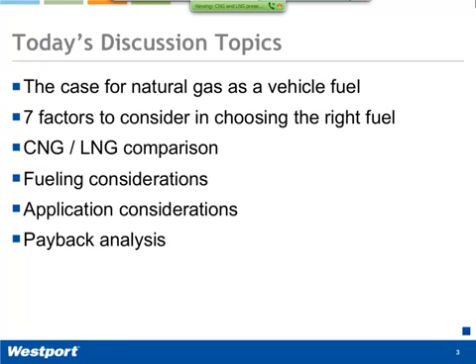Thank you, Nicole, and welcome everyone today. We're very glad that you were able to join us to talk a little bit more about natural gas, specifically the 2 different types of natural gas available for transportation use: liquefied natural gas and compressed natural gas. Today, more and more fleets are choosing to move to natural gas as their transportation fuel.

Every day, it seems, there's another announcement of a fleet or company that's decided to make this transition, and primarily they're doing this because of the economics involved. Natural gas is less expensive than diesel or gasoline, and in fact, almost the least expensive fuel available in the marketplace.

As fleets decide and make their decisions, it's important to consider the right factors as we move forward, to look at the type of engine system that's important, and to look at the fuel choice. There are some differences here, and of course there are many other opportunities for people beyond natural gas, but we won't be talking about that today. Then there's a couple of different choices with respect to how natural gas is stored.

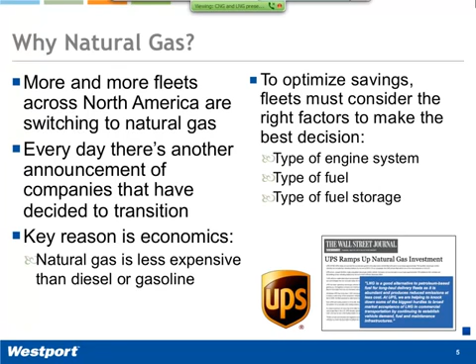So we've divided this down into 7 different factors in making an informed decision about fuel, specifically for LNG and CNG. You need to look at your vehicle type and its application and understand that very specifically, and look at the advantages and disadvantages of choosing either LNG or CNG for that vehicle type.

The duty cycle, including the range, speed, idle time, and other factors are something that need to be looked at carefully, and we'll talk about that a little bit more here.

The combined weight, the payload of the vehicle, whether it's weighing out or cubing out in its application, and then what the impact would be on that specific application in terms of weight for the storage tank, the fuel tank, and its weight as well as its contents.

The hours of service makes a difference, of course, how long the vehicle is being driven each day, what its downtime looks like, how much it's idling, and these need to be taken into account as well.

As you make the decision, you'll be looking at fuel costs and the savings achievable versus diesel fuel, or in some cases gasoline. Your fleet fueling needs in terms of refueling cycles, how often the vehicle needs to be refilled, who is doing it, and the time available needs to be taken into consideration because there are differences in the two fuel types. Finally, and probably most importantly, the fueling infrastructure available to you along your routes is going to largely determine what is best in terms of the choice available.

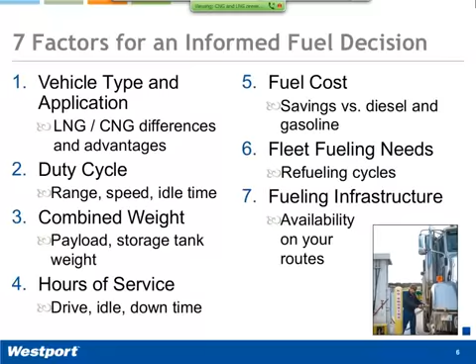Just a little bit of definition. CNG and LNG are simply two different ways natural gas is stored. There's really no such thing as an LNG or CNG engine. We see this written a great deal, but it's simply a choice as to how the fuel is stored on board the vehicle. The engines, generally speaking, will run on methane, which is always a gas, and it's delivered to the engine as a gas. If it's stored on board as CNG, as a gas, it doesn't need to be regasified. But if it's stored on board as a liquid, there is a process for returning that liquid to a gaseous state before delivering it to the engine. So that's just a distinction to help people think about this.

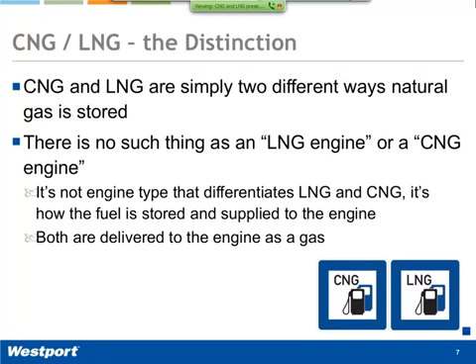The engines themselves are relatively agnostic to the fuel type, and this would apply also to other forms, like biogas or something similar. The engine doesn't really care how the gas is stored - it always uses it in the form of a gas, not in the form of a liquid.

LNG is a cryogenic liquid. It's natural gas that has been reduced in temperature to minus 260 degrees Fahrenheit, or a little over 162 degrees Celsius below zero, and that's at atmospheric pressure.

Whereas CNG is still in its gaseous state and stored at high pressure in a pressure vessel. Generally speaking, non-North American or past standards have been at 3,000 psi, and the current North American standard is at 3,600 psi for a full tank, and we would use that pressure all the way down to lower pressures, to the rail pressure of the engine before the tank is empty.

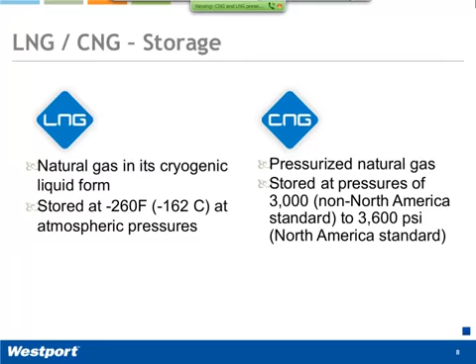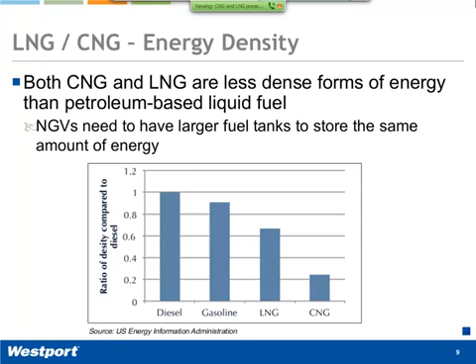Here's another way to look at it, the other way around. A gallon of liquefied natural gas - you need 1.7 of them to make a diesel gallon equivalent, and about 3.8 times as much CNG to make a diesel gallon equivalent. This is on a volume basis.

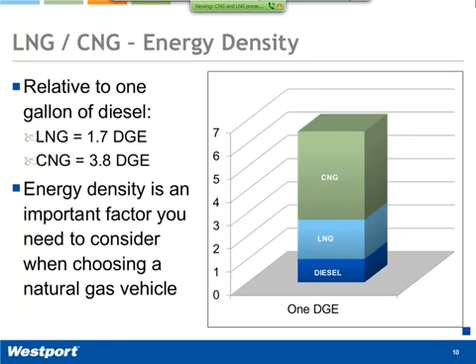Energy density is a factor that you need to consider when choosing a natural gas vehicle. This is not a factor in terms of running the engine or the amount of power the engine can put out. It's simply a question of how much storage space is required on board the vehicle.

So I'm going to turn it over to Jim right now, and he's going to talk a little bit about fueling considerations. Well, thank you very much, John.

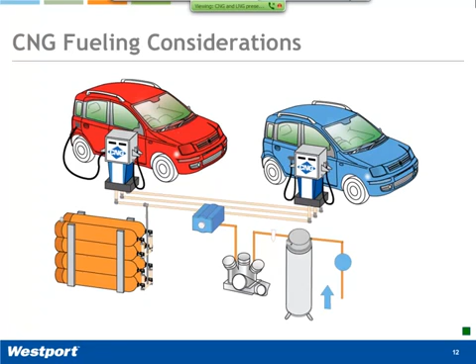We believe compressed natural gas is best suited for vehicles that drive less than 250 miles per shift or per day, or burn less than 40 gallons of fuel.

As I've mentioned, in most cases natural gas for these types of applications is delivered by the local distribution company. Our LNG stations are all designed to provide compressed natural gas, so we can compress a liquid and actually make CNG. The highway stations we're building will provide that service at a future date.

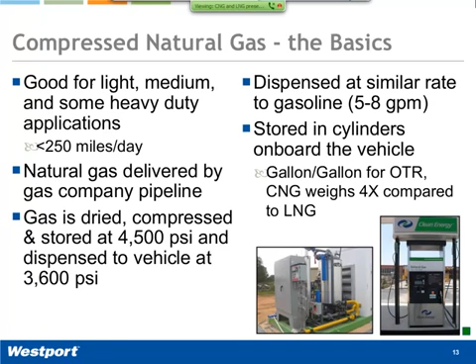On a large station, we can dispense at about 5 to 8 gallons per minute over the fill. But one important point is that when you look at a large truck, bus, or trash vehicle, the weight added for CNG compared to LNG, gallon for gallon or BTU for BTU, is about 4 times that of LNG. So if you're weight sensitive and doing bulk hauling, you'll lose payload capacity using CNG versus LNG.

The best application for CNG is what we call a time fill, where we fuel each vehicle individually in parallel, like in the pictures below. These are 2 solid waste projects we built - one in Seattle on the left, and the other in Livermore, California on the right. Today we fuel about 6,000 refuse trucks this way. We started the refuse industry back in 1997 with this type of application.

Today, Waste Management and Republic Services are 2 of our larger clients. We build most of their stations. Because of the economics, Waste Management and Republic are buying in excess of 80% of their new purchases in CNG. The CEO of Waste Management, David Steiner, has said that if he can buy CNG and has gas available, all their replacements going forward will be natural gas. It's the best value for an individual or proprietary considering natural gas.

So if you park your vehicles overnight, this is a great application. It costs less for the equipment. You're also able to get a full fill, which we'll talk about shortly. All the heat gained during compression is dissipated because you're filling over a 3 to 6 hour period. So when the trucks leave each morning, they go out at full capacity to meet their daily route with reserve.

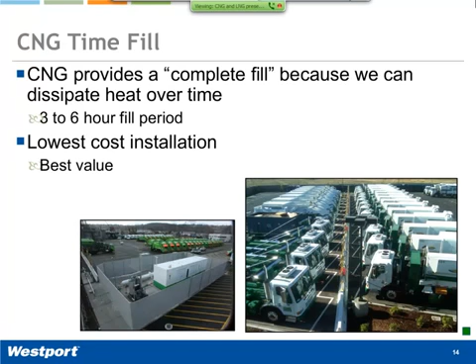One thing about fast filling a vehicle is you gain a lot of heat, which you might remember from chemistry class as the ideal gas law. If you fast fill a truck with more than 80 gallons, when the gas cools off, you'll lose about 20% of available capacity, compared to time fill where you're able to get a complete fill.

Stations that dispense at 4 lanes at 10 gallons per minute simultaneously will cost $5 million or more, and you'll need about half an acre of land. These are some of the challenges of a CNG station. Public utility services will need a minimum of 100 PSI pipeline capacity to deliver that kind of speed at the dispenser pump, and you'll need about 2 megawatts of power - enough to run 2,500 horsepower of electrical motors. That's going to be extremely costly just for the privilege of turning that system on.

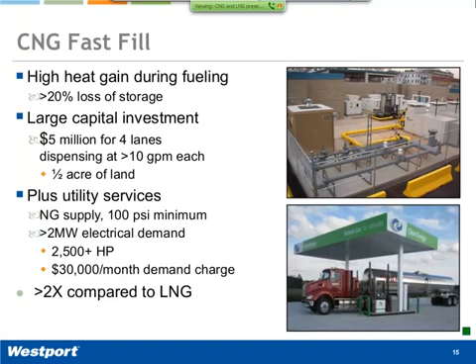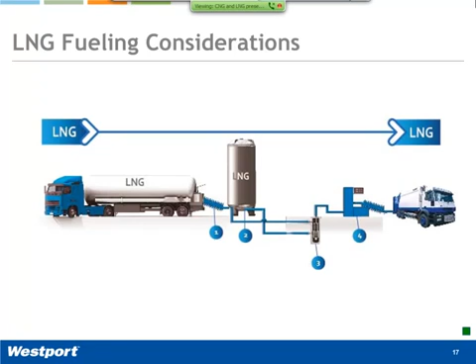So let's talk a little bit about LNG. LNG is different, and as John pointed out earlier, it's just the way that we store the fuel on board the vehicle. We can store LNG because it's substantially more dense as a liquid than it is as a gas, so you can get a longer range between fill-ups. LNG is essentially supercooled at a liquefaction plant and then delivered over the road in a tanker trailer, dispensed in a bulk tank, which are typically vertical, and then dispensed in the vehicle all as a liquid. This is almost transparent as diesel fuel. So at most of our LNG stations, we're dispensing between 15 to 20 equivalent diesel gallons per minute, just like diesel fuel.

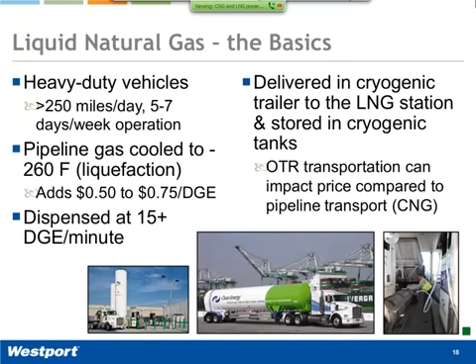So when we look at the applications for LNG, it's really high use, daily use, driving more than 250 miles per day, at least 5 to 7 days per week. The liquefaction, one of the negatives, to supercool the fuel impacts the fuel price by about 50 to 75 cents a gallon. As I mentioned, we're dispensing at similar rates to diesel, 15 to 20 gallons per minute. The fuel is supercooled at a liquefaction plant, delivered over the road in a tanker trailer, stored in the bulk delivery tanks, and then dispensed into the vehicle, all as a liquid. One point to make: with LNG, you need to wear safety glasses and gloves when you dispense the fuel, as compared to CNG, where you need neither of those pieces of equipment. The last impact to LNG is that at the liquefaction plant relative to the end-use customer, we're impacted by over-the-road transportation. So the farther the distance from the liquefaction plant, the higher the impact on the fuel cost. We like to have liquefaction plants within at least a 250-mile radius of the end-use customer.

Quick summary: diesel versus LNG compared to diesel, it's transparent in terms of fuel time, so hours of service will not be impacted for a fleet. Stations can be expanded without utility constraints. Remember, with a CNG station, you have to design the pipeline capacity and the power requirements for the compressors. If you want to add capacity, you better have excess capacity to add the extra compressor and electric motors, which sometimes are constrained. We can store twice as much energy volume compared to CNG. When you look at weight, for a bus or a trash truck or a truck that has at least 120 gallons of fuel, LNG weighs about a quarter of the similar amount of capacity as CNG. One of the negatives is that you have a shelf life for LNG — it'll boil off if it's not used. So beginning about the 5th to 7th day, if the truck has not been used, it'll start creating pressure within the tank. Typically, the tanks are set for 250 psi, so if the vapor inside the tank reaches that 250 psi limit, it'll start to vent.

The way you prevent that is you have to go out and start the engine, burn that gas in the engine for a few minutes to lower the pressure within the tank, and then start the process all over. So there's some management there if the vehicles aren't used on a regular basis.

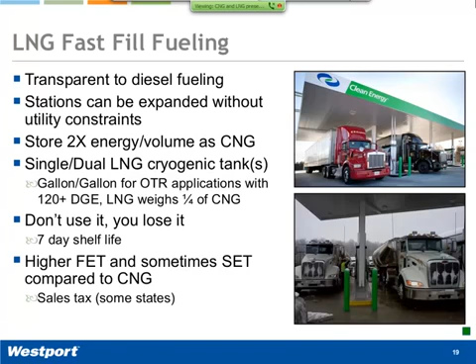Okay, I'm going to take it back over here and talk a little bit about applications for CNG and LNG from the truck side perspective.

There's kind of a continuum when you look at the vehicles that are out there, and choosing between the two really is something that you need to think about based on your application. If you're at one end or the other of the spectrum, you really don't have a lot of choice. It's a relatively fixed decision.

By the same token, for light duty vehicles with smaller fuel tanks that are running with low system pressures, those vehicles are primarily all CNG. When you're only storing a relatively smaller amount of fuel on board the vehicle, it really is less expensive to do it with CNG in terms of the tank than with LNG. There's a crossover point where LNG tanks get to be less expensive than CNG tanks as the volume of fuel that needs to be stored goes up.

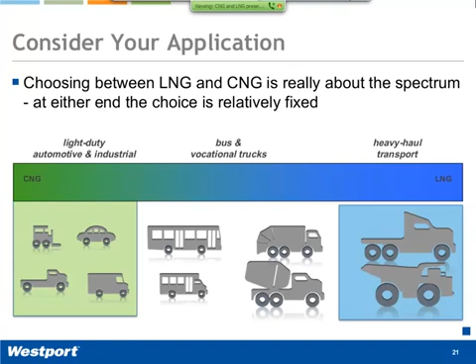And so that brings us to the middle category. When you're in kind of the vocational area, and even to an extent in the bus area, but definitely when you get into Class 7 or even the lower ends of Class 8 vehicles and vocational vehicles, you can get to a point where you can decide whether you want to store your fuel as CNG or LNG. We'll talk a little bit more about that.

CNG is a great choice for refuse and transit based on what Jim was saying. If you've got vehicles that are being stored overnight and not driven for portions of the day, using a time-fill CNG system is a very practical way to go. So we find that trash trucks and transit buses generally operate this way, with maybe fast fill as an option to quickly fuel them up if they do need that during peak demand times.

Medium duty applications are good for less than 300 miles per fill, and this is another possibility for vocational vehicles or plows or other municipal type equipment.

LNG is a good option for long driving ranges and engines that are used for hauling heavy loads. Again, when you get into that middle section, we would differentiate somewhat the spark-ignited engines from the HPDI engines, and it's really the spark-ignited engines where you've got this choice of storing either as CNG or LNG.

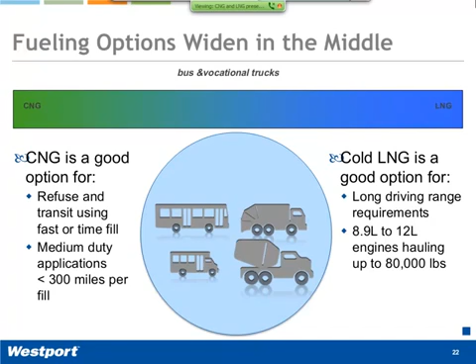So, to help evaluate, you need to ask yourself the amount of energy your vehicles require and how often they need to be refueled. It's very important, with the cost of fuel storage being one of the most expensive parts of making your decision about purchasing a vehicle, that you evaluate this closely and essentially not buy more storage on board the vehicle than you need. Look at your application and buy the amount of storage that it requires, or maybe just slightly more so you've got some backup. But basically, don't buy a lot more than you need because you'll overpay.

Vehicles that need to be refueled frequently, this needs to be taken into account as well. And as Jim said, LNG can be a good choice because fueling times with large capacities of onboard fuel are generally faster with LNG than they are with CNG.

You need to look at the number of hours a vehicle is in use per day and driven every day. With slip seat operations, where multiple drivers use the same vehicle and need to refill it quickly, LNG may make more sense than CNG. If there's available time in the day to refill and fast-fill CNG is available, that can work as well. LNG is an attractive solution if you're in constant operation and need to be refilled quickly, and I think that's the basic message here.

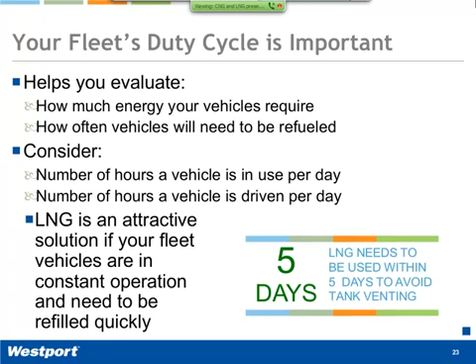As Jim said too, I wanted to reiterate that there is a shelf life for LNG in the 5 to 7 day range. It's a bit of a discussion that isn't that important, because most assets like this aren't sitting parked for 5 or 7 days or longer. If your vehicle assets are sitting parked, you have another problem. People using these vehicles generally find they're using the fuel very quickly, as part of the entire payback process.

So venting really is only an issue that's somewhat theoretical. The weight difference between the various tanks involved can be substantial. Diesel tanks are typically just welded or stamped sheet metal. Gasoline tanks are sometimes blow-molded plastic. When you look at an LNG tank, you're looking at a double-walled stainless steel cryogenic cylinder—it's heavy and requires heavy mounting brackets and capability. With CNG cylinders, you're looking at very heavy-duty, typically composite but sometimes steel cylinders mounted in steel racks and cabinets that surround them for safety and protection.

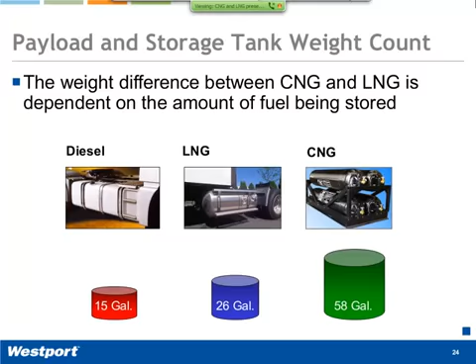So ask yourself how much tank weight you can afford. Based on your application, don't overbuy, because you're adding weight to the vehicle, and you need to evaluate your use case. For example, an LNG tank that provides 60 diesel gallon equivalents of storage weighs about 1,100 pounds when full. When we look at CNG tanks to store 60 DGEs with fast-fill capability, we actually have to add a little more capacity because they're only about 75% usable. That amount of storage capacity onboard the vehicle is going to weigh about 1,600 pounds. You have to ask yourself, for your application, is that 500 pounds important to you? Are you maxing out on the load of the vehicle before you max out on the cube, and what does that 500 pounds mean to you?

You also have to ask yourself how much space the tank will require. LNG tanks are typically mounted in about the same position as a standard diesel tank, in a side-saddle location. CNG pressure vessels can be there too, but they're also typically packaged in steel racks behind the cab. This can sometimes drive longer wheelbases or changes in turning radius based on wheelbase, which can have an adverse effect on the application, so that needs to be considered as well.

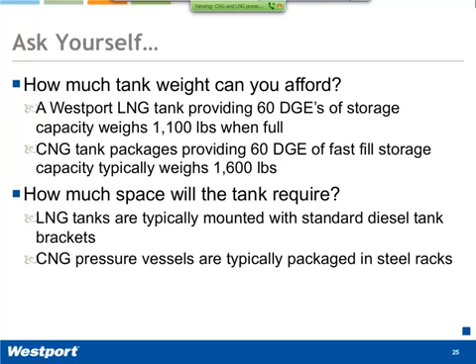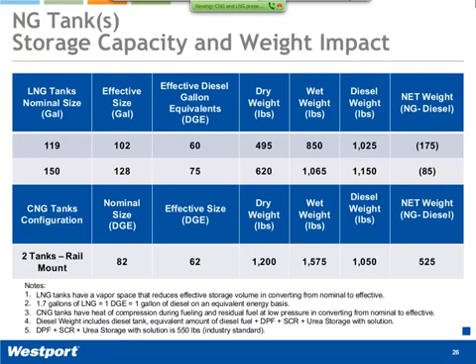This chart just shows some very basic measurements of LNG tanks in nominal sizes versus CNG tanks, and we've tried to equalize this more or less with effective diesel gallon equivalents. There are two examples at the top, 60 and 75 DGEs, and then at the bottom, 62 DGEs—we're trying to bracket that range. You can see that both in terms of the dry weight of the tanks and the net weight of the vehicles, we can actually come in, if you take into account on the LNG side the weight the vehicle carries for its emission system and urea storage and subtract that out as unnecessary with CNG, with weights for LNG that are below the diesel equivalent. It's very difficult to do that with CNG, and as you can see on the bottom row, we're estimating a little over 500 pounds of net increase to store 62 DGEs, or a nominal size of 82 DGEs, as CNG.

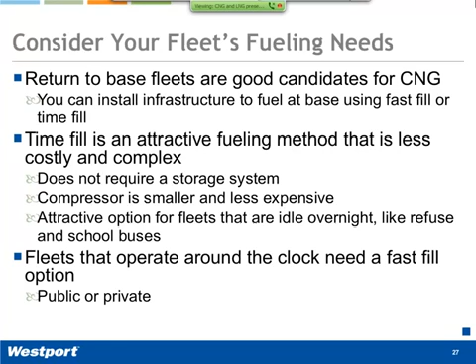Your return-to-base fleets are very good candidates for CNG. You can install infrastructure, and that infrastructure can be designed to meet your needs, whether it's fast fill or time fill. That's a very easy way to do this if you can fuel your own vehicles and control your own fueling. Time fill is very attractive, less complex and less costly. It doesn't require storage, and the compressor is usually smaller. Fleets that need to operate around the clock or that are using slip seat drivers really need some kind of a fast fill option, either public or private, and that can lead you down the path to either fast fill CNG or LNG.

So I'm going to turn it back over to Jim to talk a little bit about station investment. This is a chart we put together because there's a lot of misinformation on price across the country. When you look at websites and see fuel selling in Utah or Oklahoma for $1 a gallon, you get what you pay for. Typically those stations operated by public utilities are dispensing between 1 and 4 gallons per minute, which is great for a light-duty vehicle or a passenger car, but certainly not for a heavy-duty truck.

This stair-step starts to amortize the capital equipment and operating costs I mentioned earlier for a real fast fill station. If you look at a station wanting to dispense between 6 and 10 gallons per minute for CNG, and you start amortizing a $5 to $7 million investment plus the cost for electricity, the cost of fuel is going to be probably closer to $2.50 per gallon. So just something to consider when you make the comparison of an online look at a utility station capable of fueling at less than 4 gallons per minute to reality for your fleet that really needs to fuel similar to diesel, upwards of 10 gallons per minute.

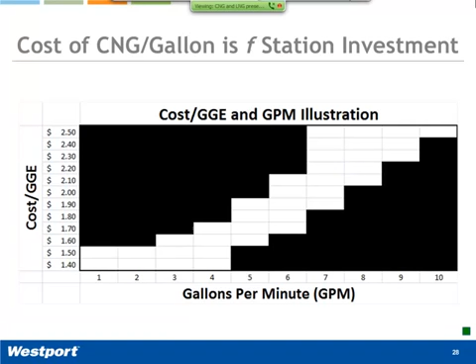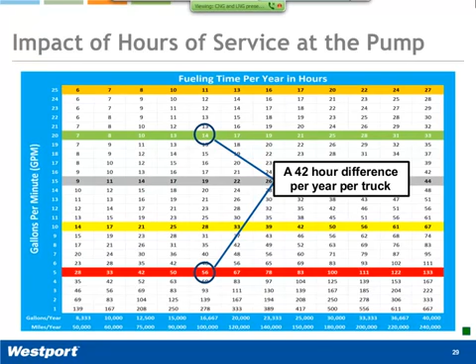So let's look at the infrastructure. Today, across North America, we have a very robust CNG infrastructure that's growing. There's at least 1,000 public access CNG stations, but more than 90% of them are not conducive to fueling trucks, trash trucks, or buses because they can't get them in and out of their aprons, nor can they fuel them at a rapid rate. They'd be there for a half an hour to 45 minutes to fuel. There are great networks in California, New York, Utah, Oklahoma, Arizona, Texas, and Colorado, but again, most of those are designed for light-duty vehicles. There's a robust infrastructure being built by several people in the industry - Shell, ENN/Blue Energy, our company - with plans to build in excess of 230 stations by the end of 2013. Today, our company has 76 complete, with 15 of those open and another 25 in construction. These are all spaced about every 250 to 300 miles, so that on a single tank trucking configuration, we can go point to point with ease and have sufficient reserve.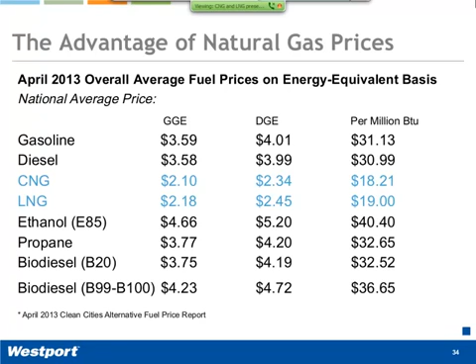When you make that calculation of 15 miles per gallon into 30,000 miles times the fuel cost difference, it's about $4,344 a year. So your investment for these trucks pays back in about 26 months, and your total fuel cost savings over the 5-year life cycle is $217,000. It's a very large sum of money. This is a great application with approximately a 2-year payback, under these conditions. You can go and look at payback calculators for the specific conditions you find your fleet in.